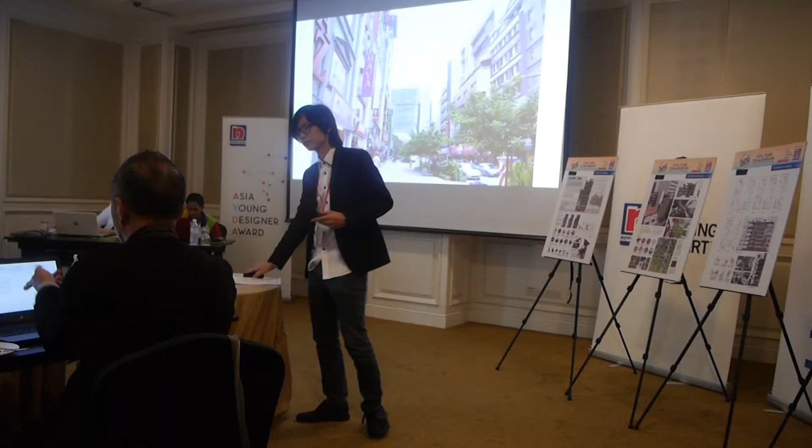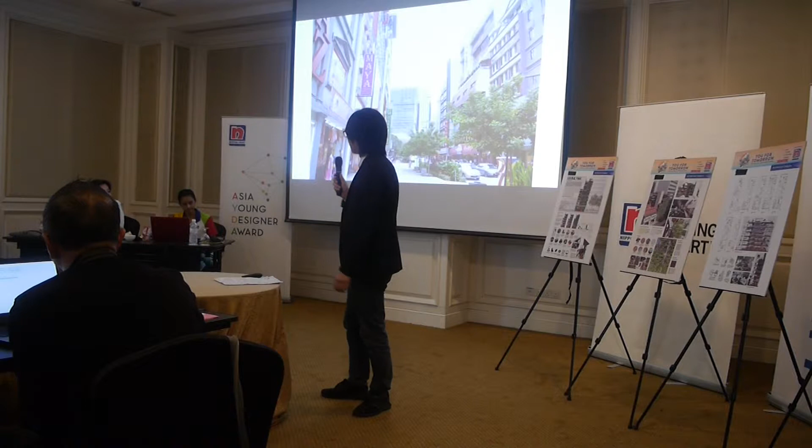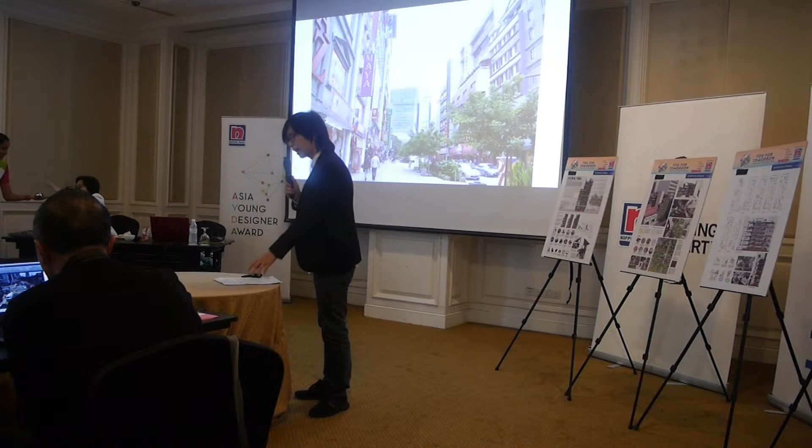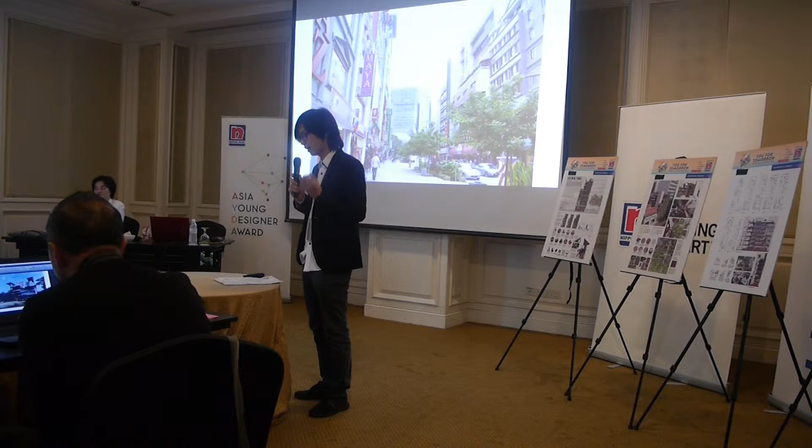Today I'm gonna talk about introducing green spaces into urban areas where available spaces are really scarce. Life in a city is stressful, but rapid urbanization is inevitable. According to studies conducted by the Douglas Mental Health Institute in Quebec, Canada, people who live in urban areas are more likely to suffer from anxiety and depression than those from rural areas. One of the reasons being is that there is a lack of green spaces in cities.

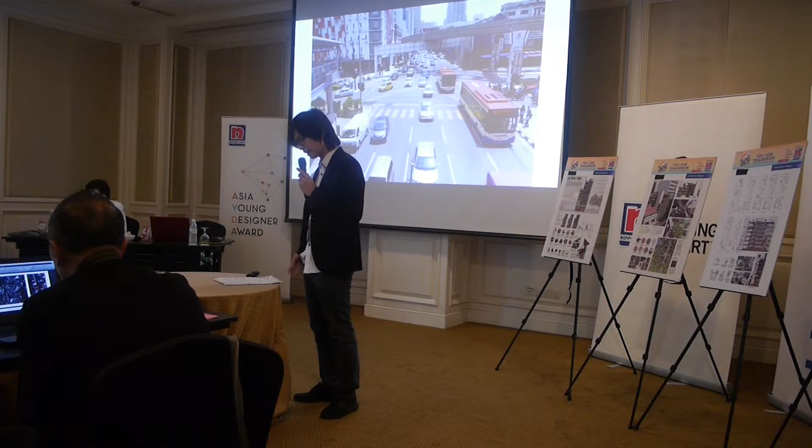However, in KL and many other cities in developing countries, very little space is designated as green space. Most of the land is taken up as buildings, roads, intersections, and parking space due to growing population demands and their economic value. More and more roads are built to cater to traffic, pollution, toxins, and crowding. These effects can be mitigated by giving humans more access to green space. Studies have shown that exposure to green space boosts health, and I want to introduce a new way of development within the available pockets within the city that reintroduces green spaces.

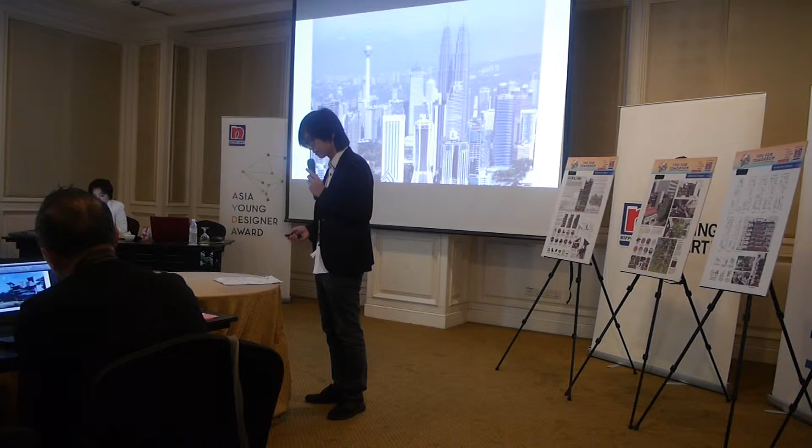First, I'm going to start off with a car park in Taylor's University, Subang Jaya. The car park is pretty barren with barely any vegetation, and people literally have to walk under the hot sun from their cars to the campus blocks. I've never seen it this empty - 6 o'clock in the morning, 7 o'clock in the morning. Imagine in the afternoon, the whole car park is filled with metal cars, amplifying the heat from the sun. And the available parking space is often far behind, a few hundred meters away from the campus block. So imagine walking like that under the hot sun - it's very uncomfortable and the experience is horrifying.

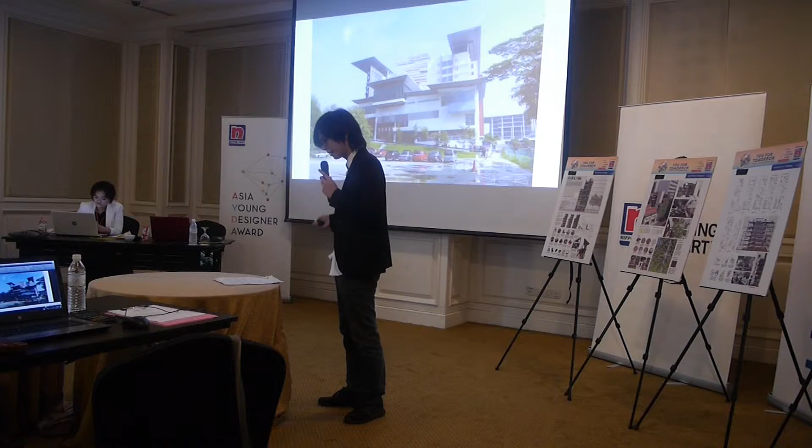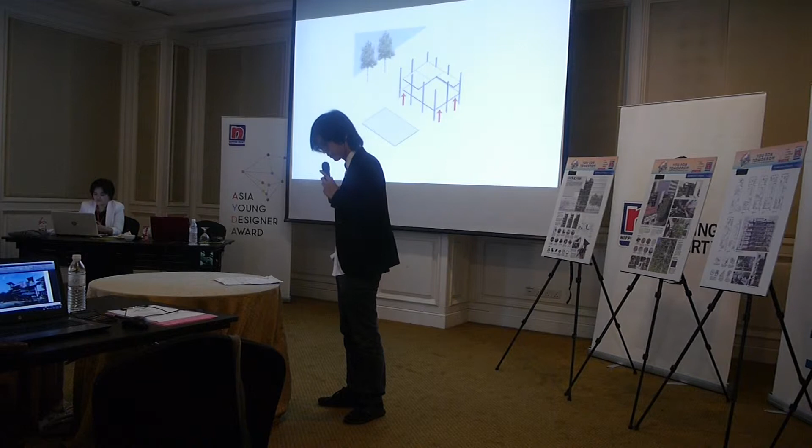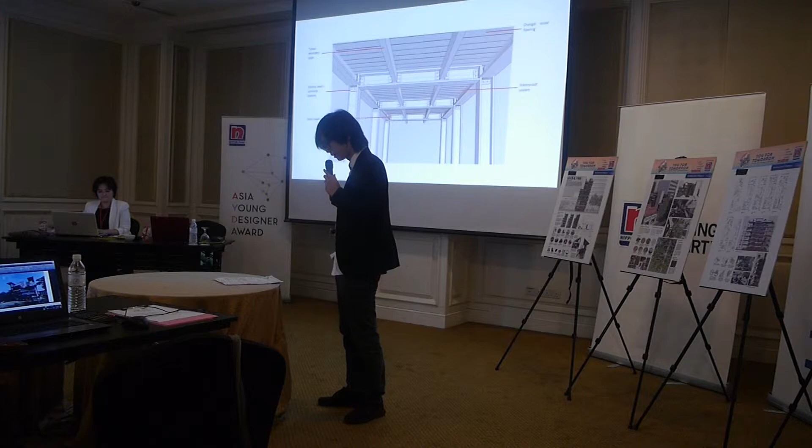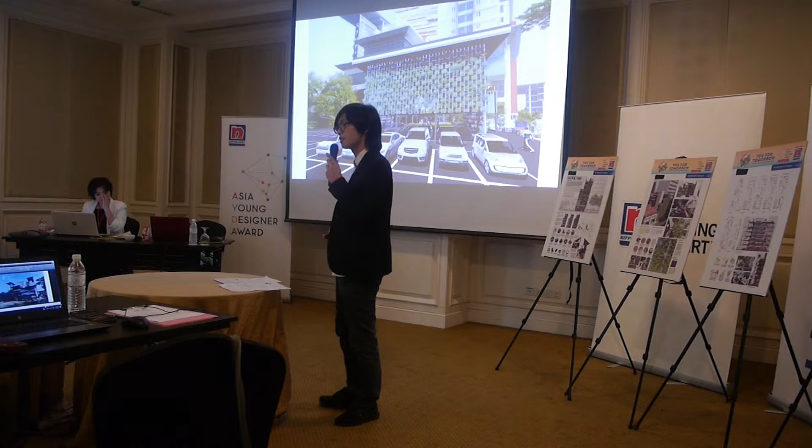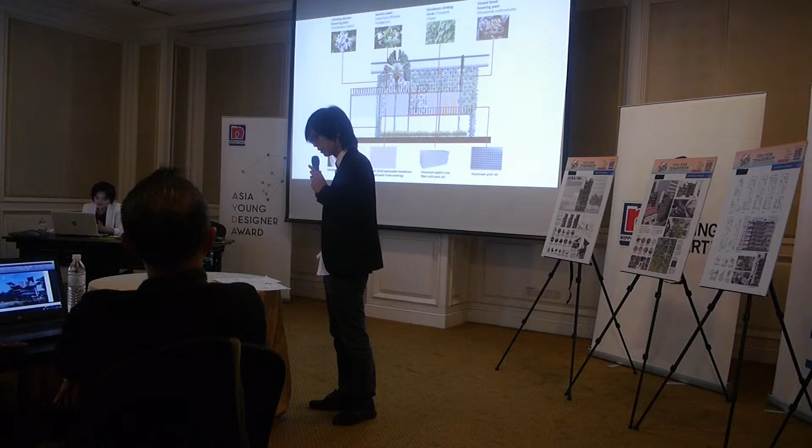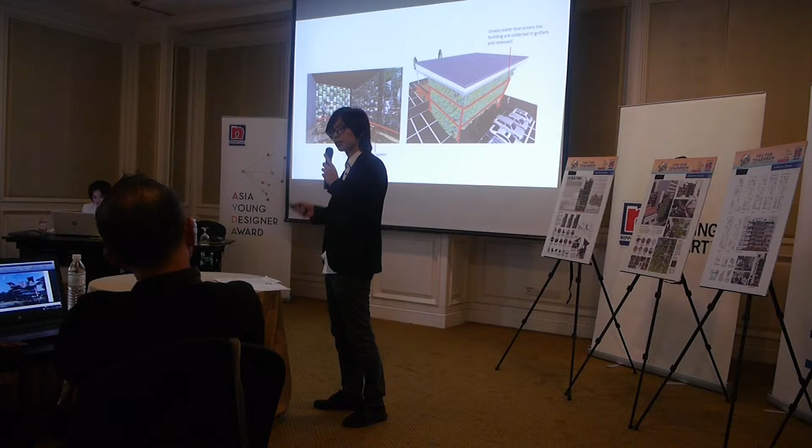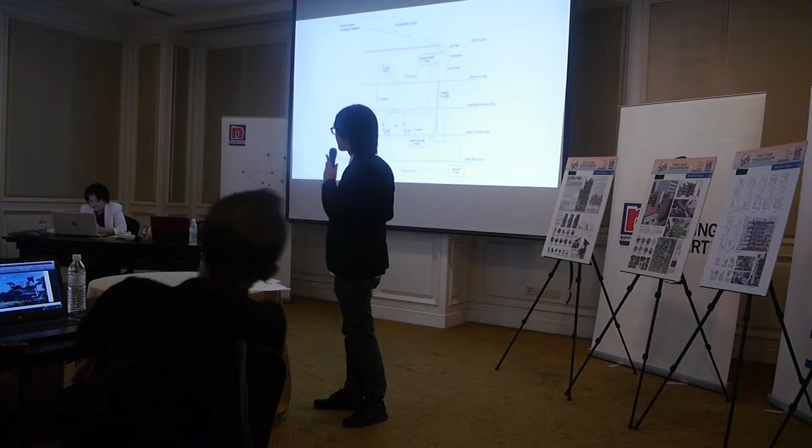My idea is, if there's no available space for horizontal, typical gardens we usually think of, why not provide vertical ones, since space is already scarce. This system is a combination of vertical aluminum members and horizontal cable rods, which enables the plants and creepers to grow on it. Planter boxes are placed at intervals. It integrates lush tropical greenery into a heavily urbanized context, and here are some suggested plants which suit the tropical environment. It provides a semi-permeable membrane where air and oxygen can pass between both sides of the facade, but sunlight and rainwater cannot enter the building. There's a system of gutters covered with metal grills which collects the rainwater, prevents it from entering the building, and also collects the water for irrigation purposes - rainwater harvesting, as shown in this schematic diagram. Aside from rainwater harvesting, grey water is harvested as well for irrigation purposes.

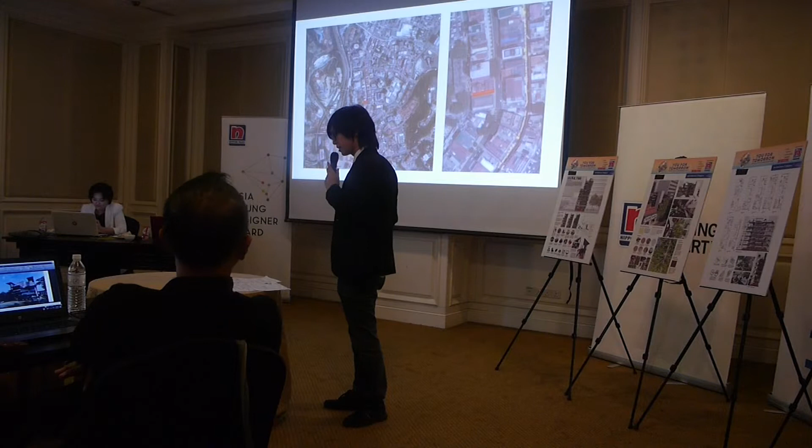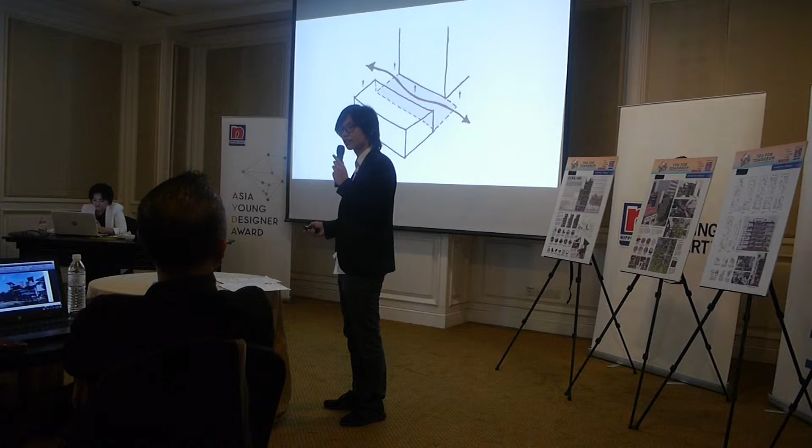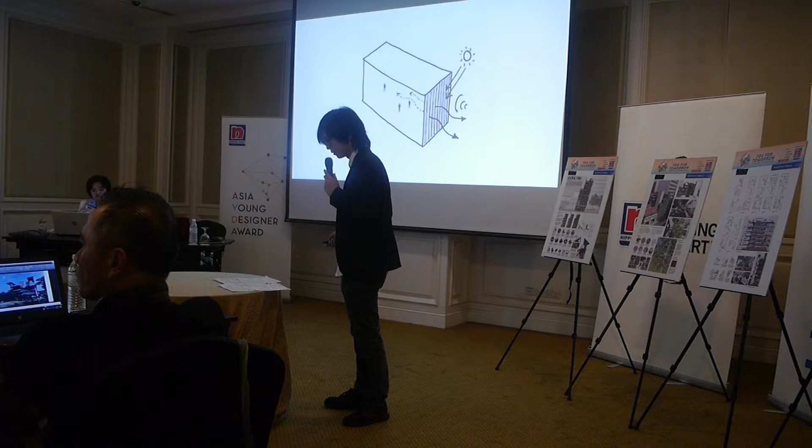Moving on to another site, in the middle of the dense urban jungle of KL, which is Jalan Tar - this is an example of an alley, one of those small pocket spaces within the city. If the empty slot is chosen by the client to have a building built on it, my suggestion is to keep the original context - if pedestrians use it as a shortcut, preserve it as a shortcut, and elevate the plants from the ground, using the same stilt solution as suggested before. A vertical park is created for users to reduce noise levels from traffic by refracting and absorbing acoustic energy, filtering polluted city air, and reducing temperature through evapotranspiration, which reduces the urban heat effect. If the site is long and narrow, an area is added to allow hot air out of the building's interior, designing based on this unique context.

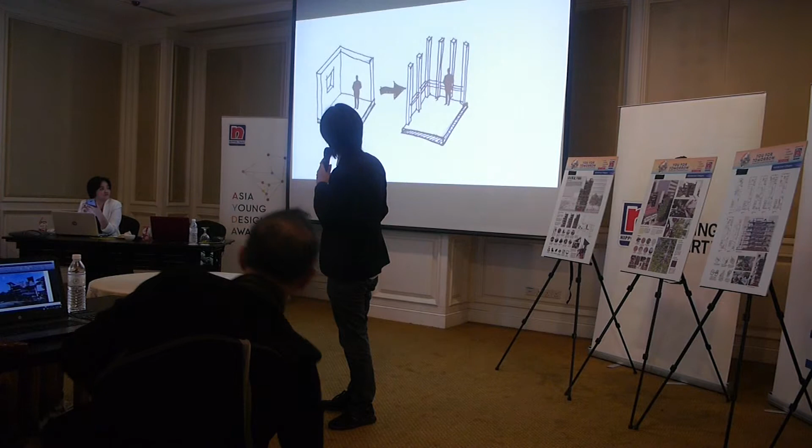And the rendering. The exposed structural system liberates people from the constraints of a typical solid wall, and adequate plants such as bamboos and creepers act as a shade and improve both air and aesthetic qualities.

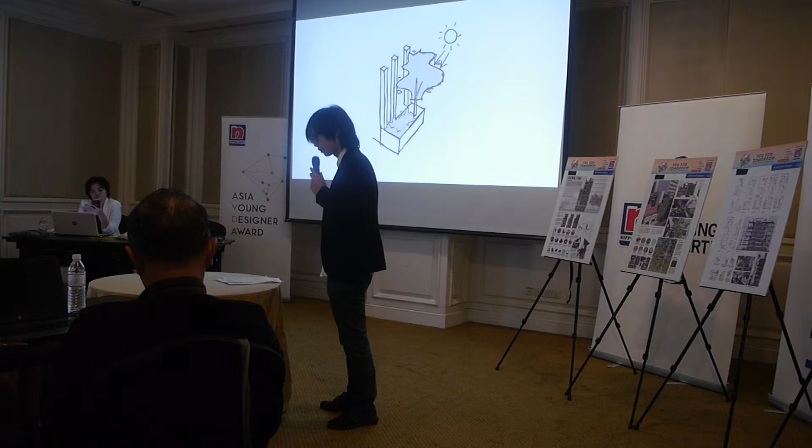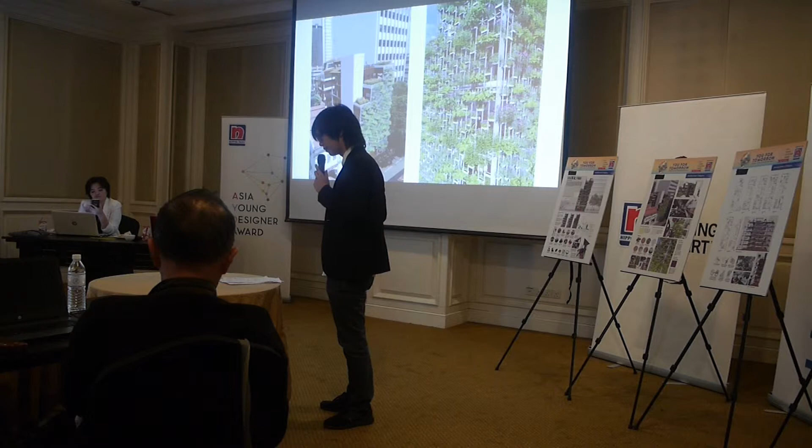Modular green walls are essentially a living cladding system with its rich biodiversity. Evapotranspiration cools the tropical heat. Visitors are greeted with this vertical lush greenery and savor the soothing effects from it.

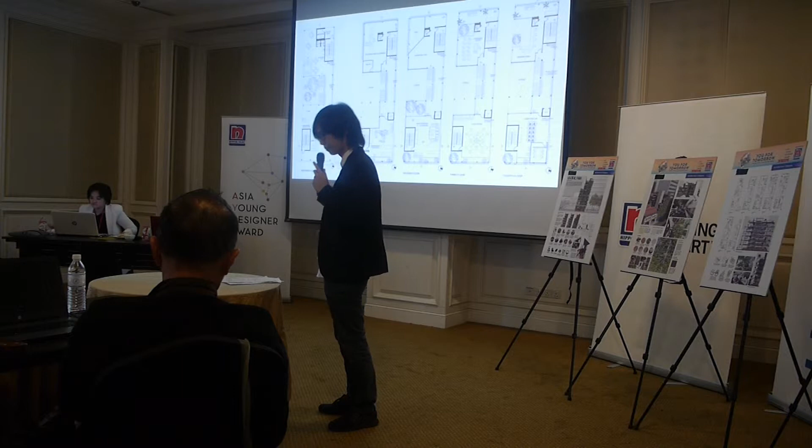The plants are free and only constrained by the structure, which already has a grid format. So any building can be built on any pocket space available if the client insists. But even if the building is built there, it doesn't contribute to the urban heat island effect. Well, not too much.

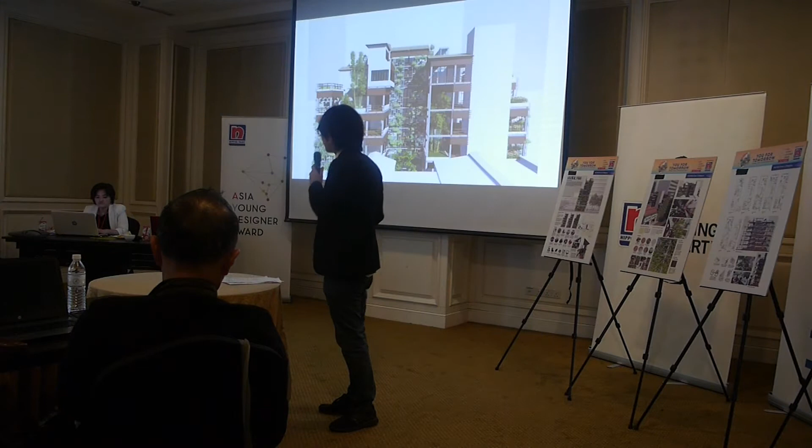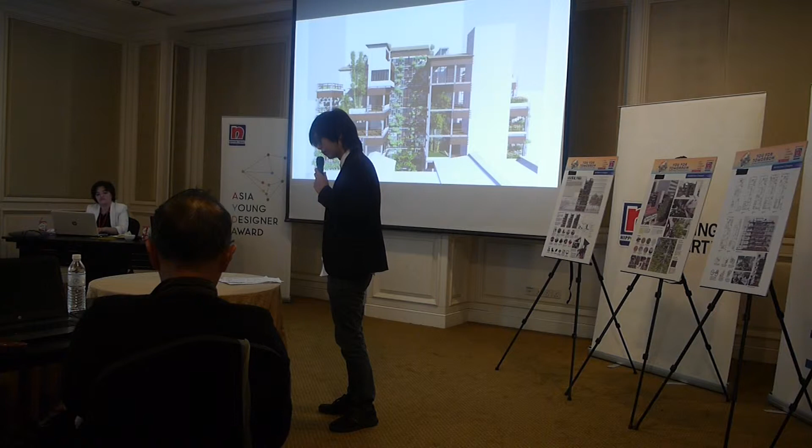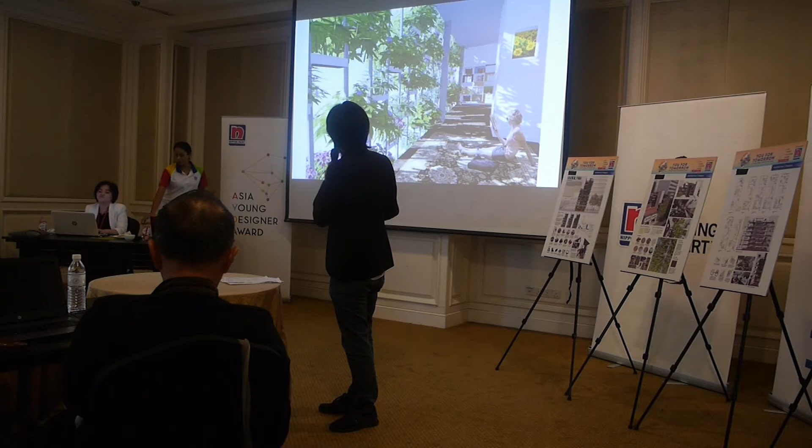It is a resurrection of the lush KL that was lost in the progression of time. A metamorphosis of the originally barren site to a vertical park, a garden, hidden in the dense concrete jungle of KL or any other tropical city. It's a celebration of the shades, colors, the play of light and shadow in the tropical context.

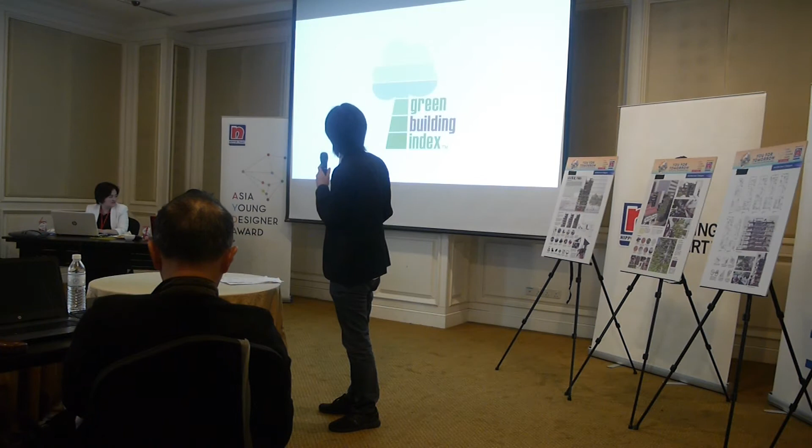So another idea from me is that we can add this to the GBI system. The GBI is a system where buildings get points if they meet certain criteria, such as SM, Sustainable Site Planning and Management. So why not put this green facade as one of the criteria for them to get points?

The GBI is a form of branding for developers to market how green and eco their buildings are. Since the green facade is modular and could be sold in units, a system can be created to give points to those who use it as their facade, since it's beneficial.

So I hope my idea can propel our nation into a greener future where living qualities are taken care of. Huge populations in cities can be sustained with good air quality, with the negative effects of urbanization reduced by implementing plants. And that's it. Thank you.

Is it a building or is it a park? It's a combination of both. It's like whenever a building is built, this thing can be implemented so that it could be a park. Is it built on public land or private land? Private or public land? Can be anything.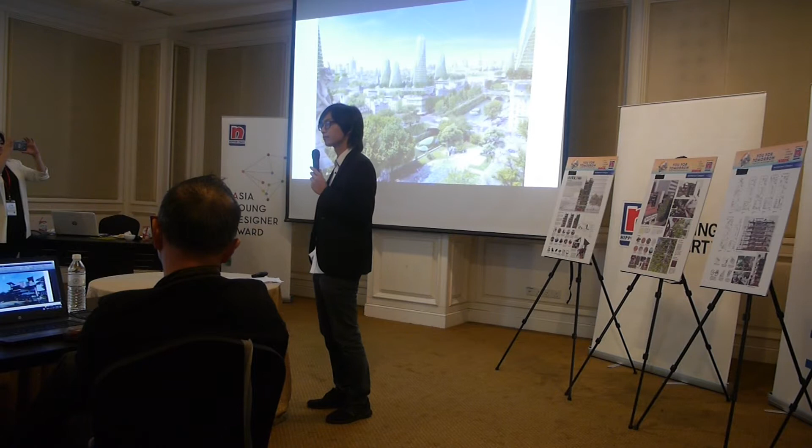Yeah, okay. You've shown us some examples, not your project, like for example just now you showed Le Nouvel. You know that in vertical green, one of the key issues is that it's very costly to maintain. What steps are you taking to counteract that?

Well, solar panels are really expensive, but they are included in the criteria of GBI, right? So since my idea is very beneficial, it solves a lot of problems in the urban area, like it reduces noise, filters the air, and all that. If you include it in GBI as a criteria, people with the amount of money will be willing to use it.

I think it's already heavily included in the green building index as a criteria. There are two or three areas from urban landscape to OTTV, right down to the innovation point. So easily you can score 7 to 8 points.

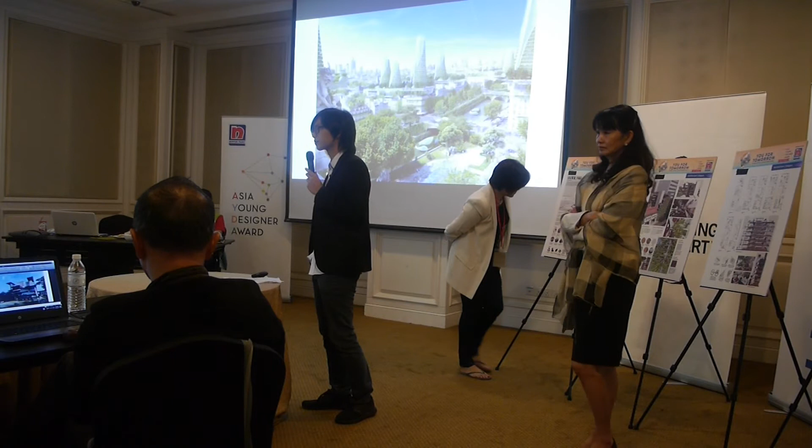It's not about scoring the points, it's already there, it's how smartly you score the points. Because for example, you can have a very low BEI, you can have triple glazed glass, or you can do passive design. So how smartly are you going to do your green wall? That's my question.

Because there are many of us who are here who are ex-GBI or current GBI AP or directors. So...

Actually, I was hoping that you can talk more about your project because it's the basis. I expected you, but I didn't hear much about this.

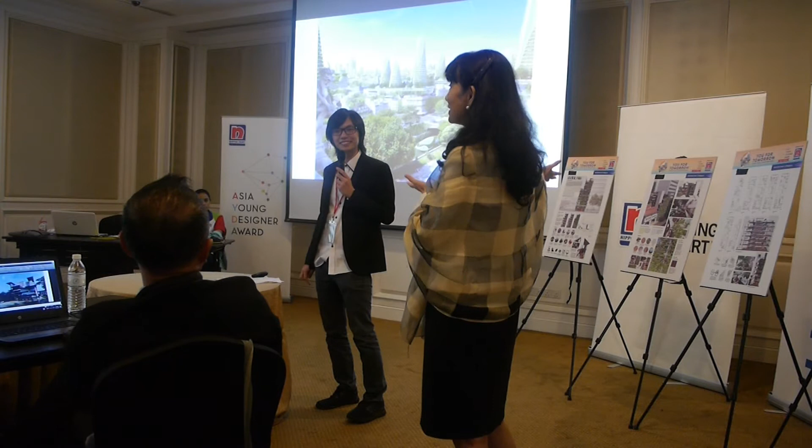Now how smart are you going to do that green wall? Because I think the whole project is about that green wall and about maintaining that green space. So how are you going to maintain that? Because a lot of the green walls, if you look at in the KL area, one of the key issues is they are dying out.

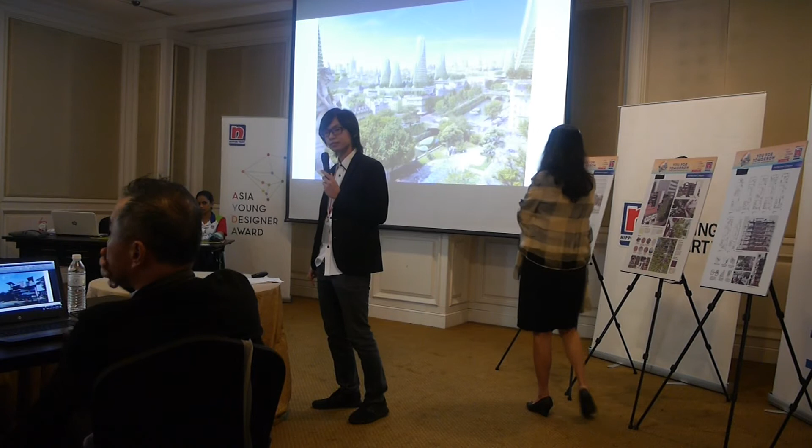Because they found out that by specifying the wrong plants, you can't maintain them. Maintenance is not in order, I think that's one issue. But there's another issue: is it based on this as the final scheme of the building? Do you have this green scheme just to make the money? It's public.

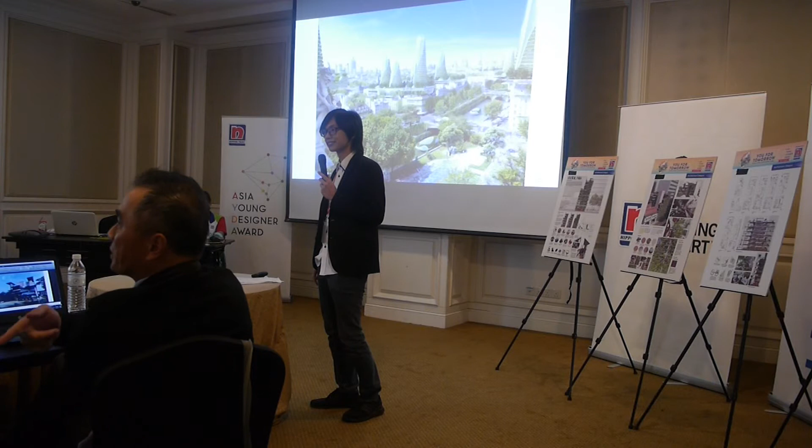That's where we are going wrong. Are you done? I'm asking you a question. My question—because he's talking while I'm talking. Okay, one by one, the judges are over enthusiastic.

The question is, you have that as a final scheme of the building. You say it's going to stop rain from coming through. You know that Malaysian rain is torrential.

Well, there's a gap between the green walls. Listen to me first before you finish answering. You know that Malaysian rain is torrential. When you say this plant is going to stop rain from coming into your building...

There's actually a layer like something like a mosquito net. You let us finish our question before you interrupt, it's very rude. Sorry. And indoors you have furniture, carpets, books, bookshelves, and you have this torrential rain coming through, and even if it just filters through, it's still going to be wet.

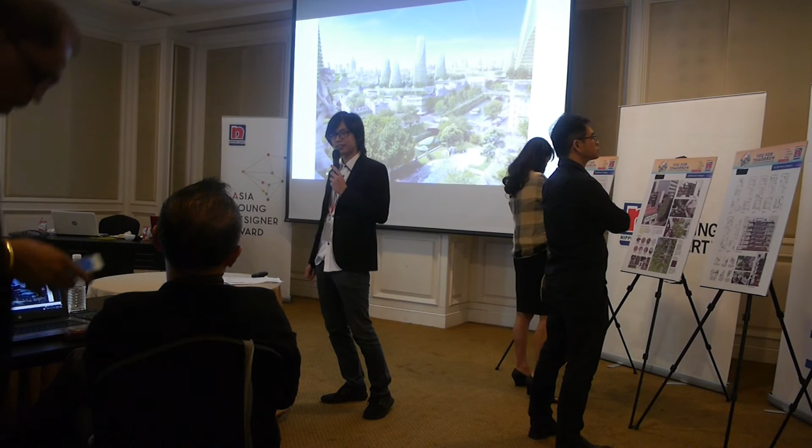So is that something that you considered? Or do you just think that, look, I've got a drain on the side, then it should be fine? Well, there are other strategies you can implement, like even a reverse... No, but your proposal is this though. So what do you think of that?

Well, there are many strategies to prevent the rain from coming in. One of them could be adjustable louvers. When it rains, you can close them up. That's not what you proposed.

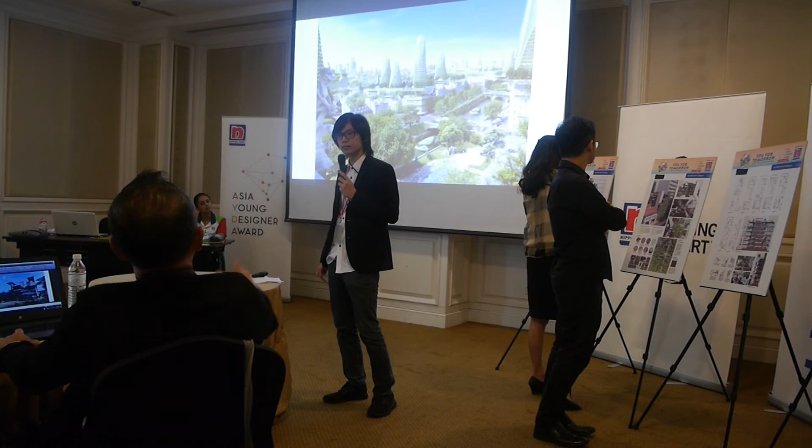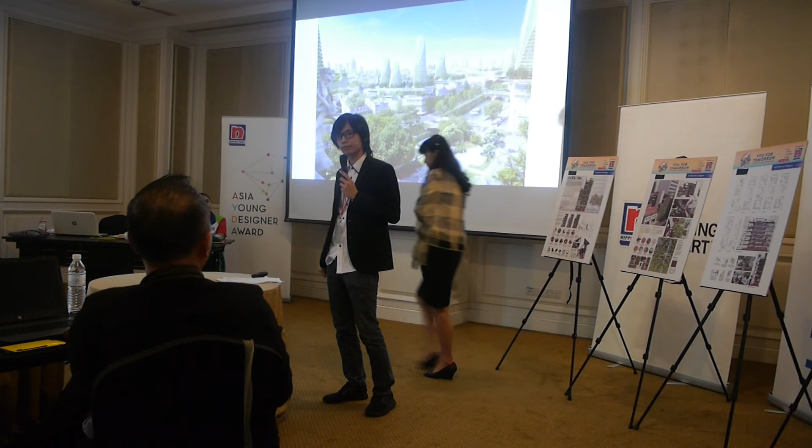So are you proposing this as the final one, or is it going to be a second tier screen? Because the whole premise of your presentation or your project is based on this wall. So your wall must be perfect, or else your hypothesis doesn't work.

You get it? Yours is not about a project, yours is about the scheme. So does it bother you that it's permeable? Or do you think that we should live in a permeable environment? I did mention it's semi-permeable.

Yes, but is it okay for you to live in that kind of environment? Do you think you can take it without the air conditioning, without the ceiling fan on? I sleep without air conditioning. I'm actually quite strongly against air conditioning for residential houses. I agree.

But I really just need to know the majority. I know even my family, none of them can sleep without aircon. I'm the only one who does that. But is that a solution for Malaysia?

Do you think? Probably they'll be too pampered. No, that's not the point. The point is you are dealing with a segment of the community that you're designing for. Do you think they will be able to accept that?

Why not? Within the building, there could be spaces for mechanical ventilation and spaces which are more public, which doesn't require it. I agree with you, but 'why not' is not an answer. Why would be the answer? Why do you want to do this?

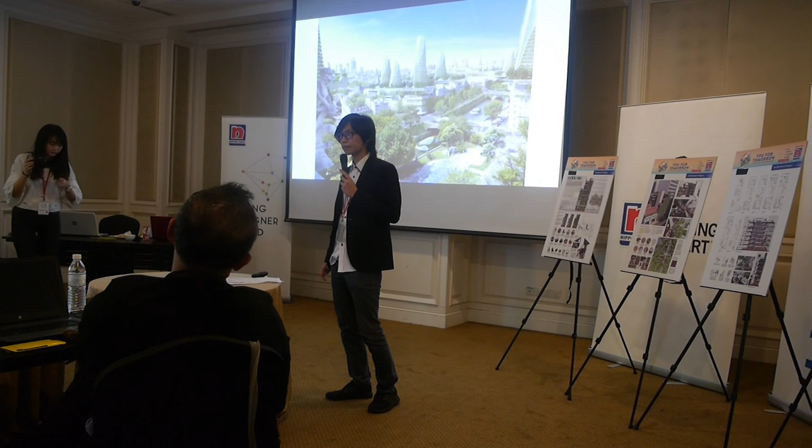They will bring it... well, when you're in a mamak stall, it's like there's one huge opening, right? The heat comes in, it's very open. I'm at a mamak stall like half an hour, one hour.

I think this will be the last question. I know, Alvin, you're quite enthusiastic, but I think we have to cut it at the last question. Well, he still hasn't answered my first question. That was the only question. The time is up, he can answer for another hour or so if he wants.

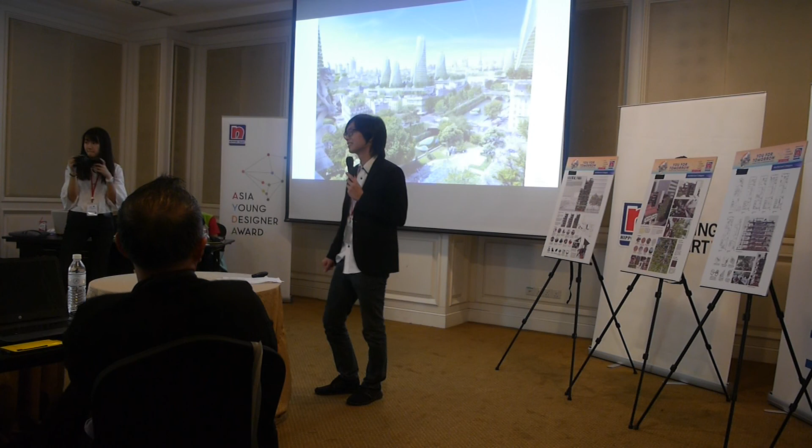No, but he's not answering it. The time's up, I understand. Time's up. Okay, thank you. Thank you.

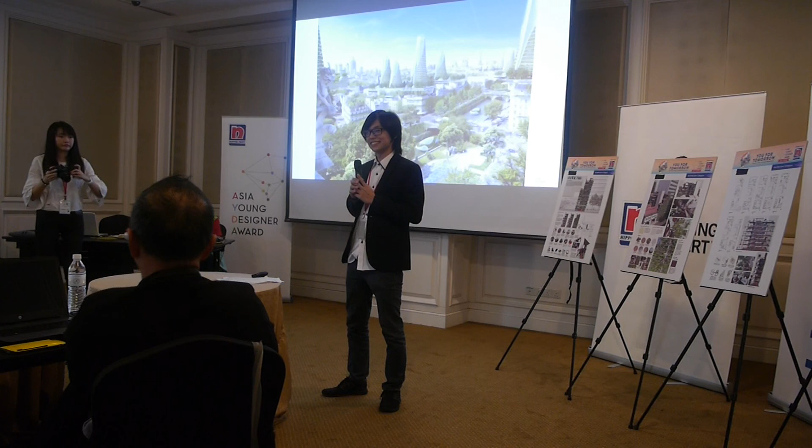So, our next will be...